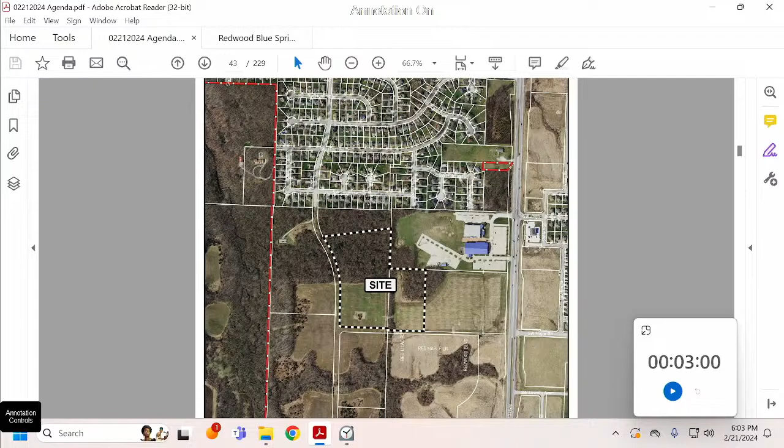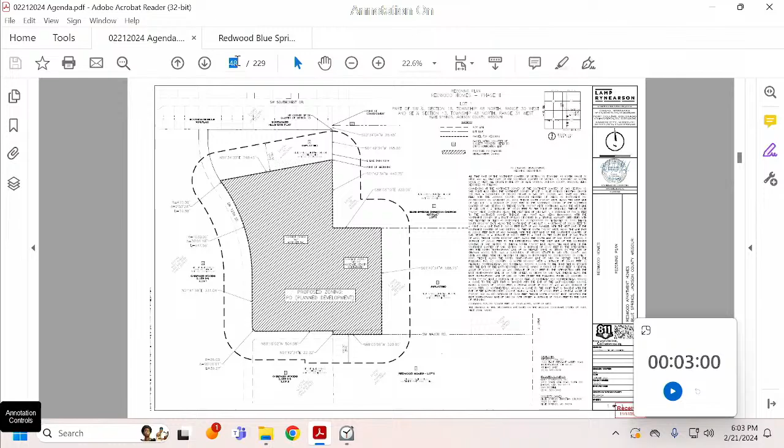The second request is for a PD concept plan to accommodate the development. The PD concept plan covers 18.78 acres requested to be rezoned and proposed to be platted as one lot. The proposed development includes 104 units in 19 single-story buildings ranging from 4 to 8 plexes. The unit sizes range from 1,294 to 1,620 square feet livable space. The development's housing density is 5.53 dwelling units per acre.

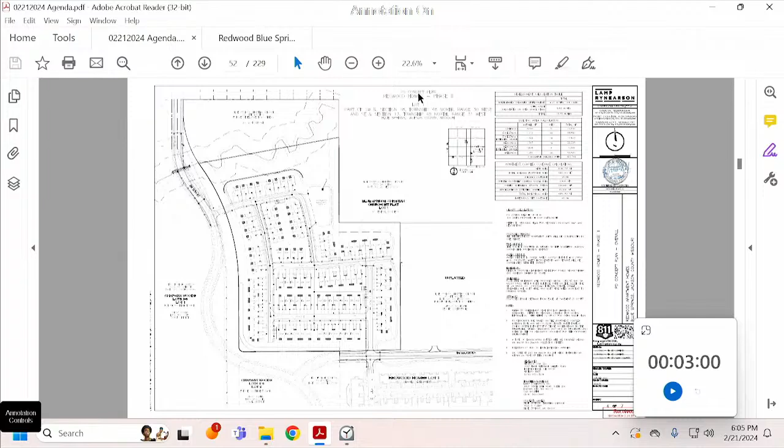As part of the Redwood's first development phase, Southwest Major Road will be extended west to Southwest 7 Highway to provide access. The additional extension of Southwest Major Road further west will be constructed to accommodate access for the second phase and additional access for the first phase. Furthermore, as part of the second phase, Southwest 12th Street will be extended south for the project entrance. A 5 feet wide ADA compliant sidewalk is required along the north side of Southwest Major Road, with an 8 feet wide ADA compliant multi-use trail on the south side. Along both sides of Southwest 12th Street, 5 feet wide ADA compliant sidewalks are required.

Through the PD zoning and concept plan, the site is being reviewed under the apartment complex building type and MF10 low-density multifamily zoning district standards. The plan meets all the requirements of the apartment complex building type for setbacks, density, building separation, coverage, and height. Each unit includes a front-loaded 2-car garage with a driveway for 2 additional parking spaces, for a total of 4 spaces per unit. Additionally, 26 guest parking spaces are provided on separate parking areas throughout the neighborhood.

Conceptual plans, elevations, and images have been provided for the buildings. Each unit includes a 2-car front-loaded garage with a private entrance. Building materials include a mix of masonry, vinyl siding with lap and shake styles, and a mix of colors. The residential design standards limit front-load garages to a maximum coverage of 25% of the facade. The proposed building plans include up to 78% of the front facade being garage doors. As the additional off-street and covered parking is an enhancement for the community, a modification through the PD concept plan is proposed to allow for this exception to the garage coverage. The plan includes enhancing garage door designs with added design details and hardware to mitigate the additional coverage.

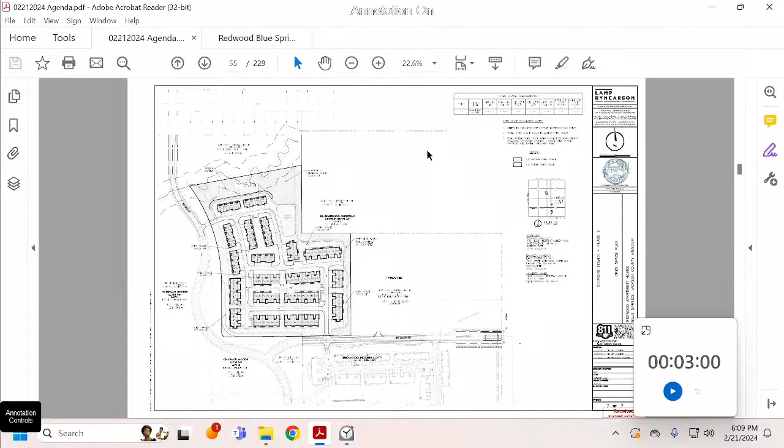Are there any questions from the council? Councilmember Fowler? Yes, Your Honor. Thank you for that summary.

On page 28, the list of reference documents attached, and the last sentence, the last few words, says 'and letter of opposition.' Could you tell me about that letter of opposition? I didn't see it there. Yeah, right in that box, the last of number 1 there, list of reference documents attached, and then it says a letter of opposition.

To our knowledge, we did not get a letter of opposition. That may have just been a holdover from a previous file that was left in there accidentally, but we did not receive any letters of opposition for this project. Okay, so apologize for that mistake. All right, thank you.

I think I remember from the first Redwood, the streets on this, they're not built to city standards. They're going to be private streets, is that correct? That's correct, private streets not built to city standards. And so they also don't have curbs? The last group didn't have curbs, this doesn't have curbs either. That's correct. So it's just the flat street and then someone's yard and then right into their driveway, etc. In terms of the street, the curb, and the sidewalk, that's correct.

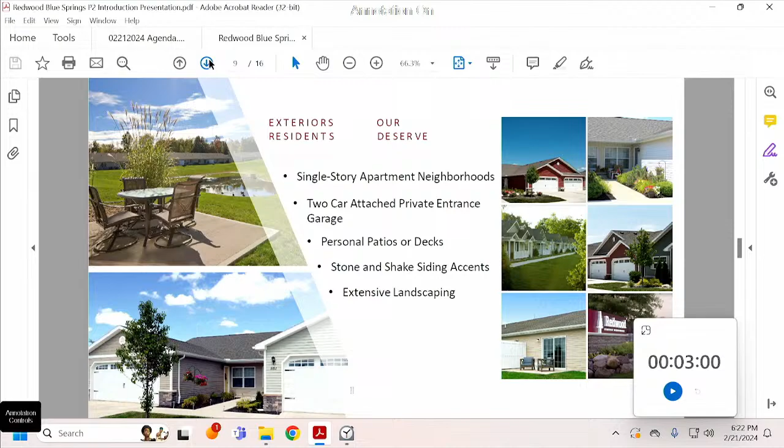Interiors are what you would expect in a nice apartment. Granite countertops, black steel appliances, luxury vinyl tile, nice plumbing fixtures, vaulted ceilings. It's something you would expect in a nice place.

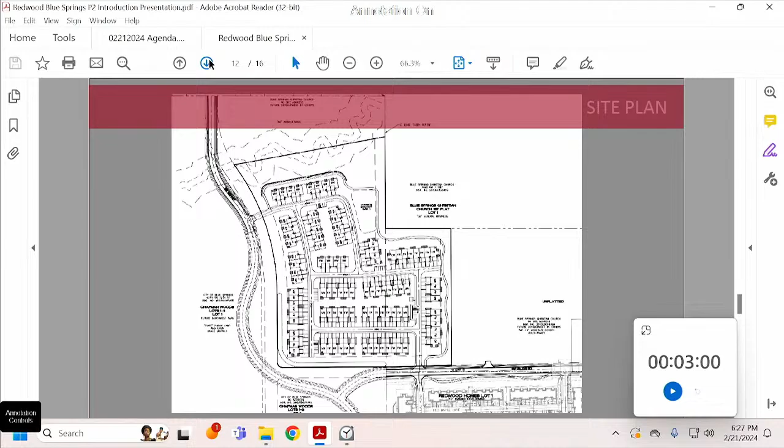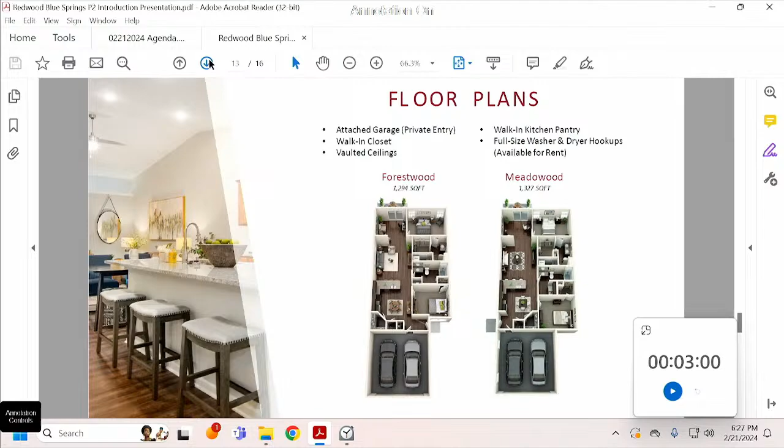Next slide, please. Example floor plan, same ones you've seen. Again, 2-car garage, 2-bedroom, 2-bath. Every unit is 2-bedroom, 2-bath, and every unit has a patio.

Next, please. The 2 different floor plans: the Forestwood is basically our bread and butter unit, Forestwood with a sunroom. The Meadowood is a little bit different, a different kind of floor plan. Again, 2-bedroom, 2-bath, 2-car garage, but just a different style floor plan. Next, please.

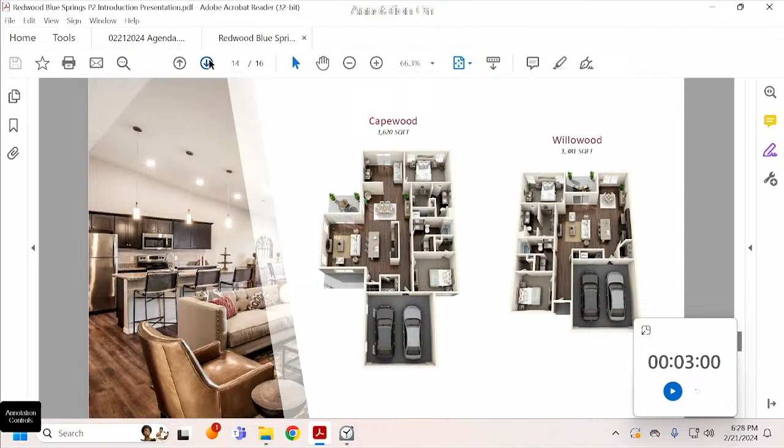So there's the plan for the park. I really just have it in here for reference.

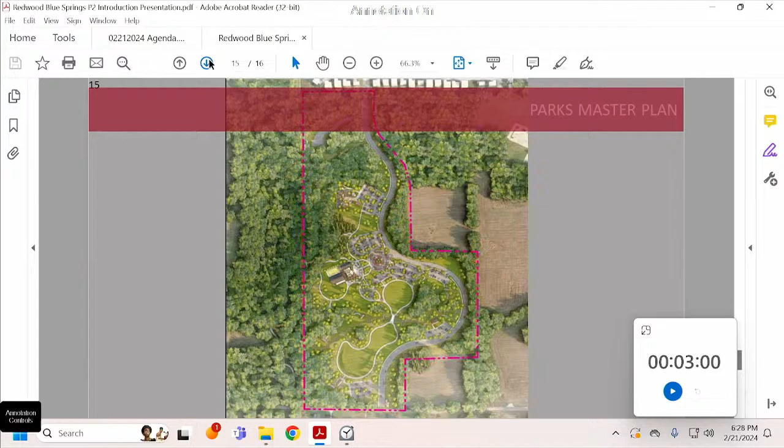I think the only other thing I have to say is we have been consistent with what we had proposed and had approved in phase 1. We've been consistent with the architecture, we've been consistent with the streets, we've been consistent with everything that has been approved in phase 1. I think that's it. If there are any questions.

At least on the application, it looks like here, at that point, the owner was the church. So is that, but you also mentioned tonight that you guys have bought the property, so.

All right, let me sort that out. We bought the property for phase 1, we've closed on it. The church still owns the phase 2 property. Okay, so at the moment, what we're talking about building tonight is still owned by the church. That's accurate, that's consistent with the application. Yeah, that's accurate. I'm sorry if I confused you.

That's fine. So the, and again, private streets, so you mentioned no parking on the streets. That, our police force couldn't enforce that on private streets, so you're gonna enforce that? Yes, and we do in all 160 neighborhoods.

Yeah, it just seems like when somebody has a small party or something, there's probably gonna be parking on the streets. Well, so a lot of it has to do with the length of people's stay. And a lot of it has to do with the nature of who our constituents are, and I'm not saying that there aren't empty nesters that are problematic, but a lot of it has to do with that as well. A lot of it has to do with each unit having 4 of its own and a smattering of parking places throughout the site, additional parking places throughout the site. So a lot of it has to do with that.

And a storage residential warehouse land use in addition to the general businesses land uses outlined in the UDC at 1800 Southwest Lenore Street. This property is generally located north of 40 Highway.

The first request is to rezone the subject property to PD Planned Development Commercial. The 2014 comprehensive plan included the subject property as mixed-use employment dominant.

Mixed-use employment dominant, which is defined as a mix of businesses that can include office, service, craft manufacturing, or light industrial uses, and small-scale retail or institutional uses to help support the primary function of other job-creating uses.

The intent of the PD zoning district is to encourage unique, high-quality neighborhoods, commercial or mixed-use development through an integrated development plan that provides flexibility to standard zoning district regulations.

Through the PD zoning, the applicant is requesting a car wash and storage residential use in addition to GB general business land uses outlined in the UDC.

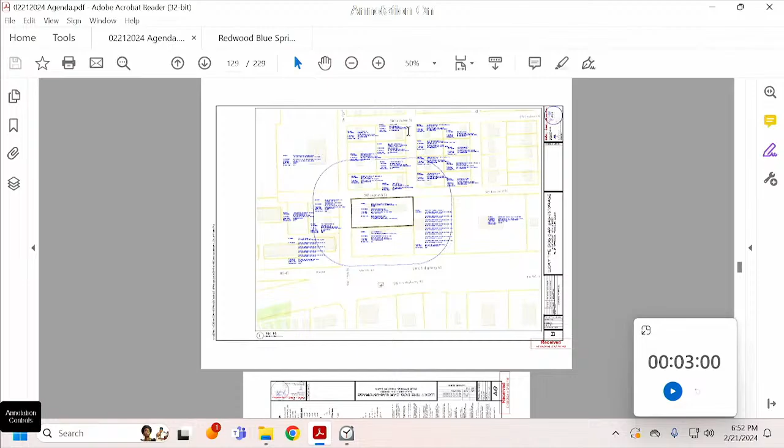The second request is for a planned development concept plan covering the entire 0.95 acre property. The site includes one 5,810 square foot metal building, car wash with car wash bays facing Southwest Lenore Street. According to UDC section...

405.080, when a property undergoes a change in use, only site improvements are required to be brought into conformance with the current development standards. Thus, no development improvements are required at this time, and it may remain as legal non-conforming structure.

However, any future building additions cannot increase the non-conformity of the building.

As part of the PD standards, the applicant is proposing the following. The only land uses allowed that would be permitted are car wash, storage units, storage residential warehouse, as well as land uses outlined in the general business zoning district.

And the subject property will utilize the general commercial building type, with modifications requested to the underlying zoning district. The proposed modifications include waiving the requirements bringing the site into conformance, waiving the required setbacks, bicycle parking, pedestrian access, and landscape requirements.

If allowed, warehouse residential storage shall provide one parking space per 5 storage bays. Based on the proposed storage bays, the applicant must provide 3 parking spaces to meet the required vehicle parking.

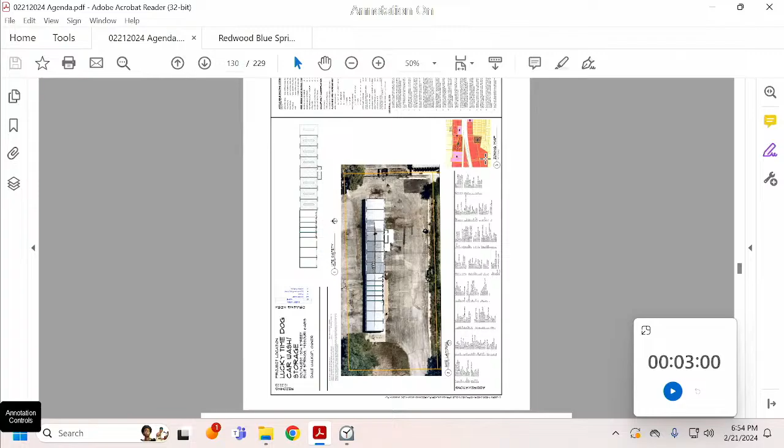Staff recommends approval of the planned development concept plan with conditions. Staff would be happy to answer any questions. Any questions from council?

Like seeing none. Oh, Your Honor, may I?

Go ahead. Just a question, with this being changed to storage, they've already increased the size of the unit as far as roof plant and that. Does that affect anything as far as stormwater runoff? In other words, this is a lot of paved surface and there's been issues with the stormwater runoff because there's really no detention for it.

All that pavement surface just runs right down the street. As Councilman Fowler mentioned earlier, we do have some issues in the older part of town with no curbs and gutters. So it'd be nice to maybe have some improvement to that part of the paved impervious surface to at least compensate for some of that stormwater runoff with all these improvements that we're approving.

It's my understanding that because they're not adding any additional square footage, they're only filling in the car wash bays themselves, that they're not adding to the impervious surface on the site and therefore are not required to provide any additional water quality or detention.

Okay, because of that. If they were adding square footage in terms of building area or removing any landscaping and putting in pavement or building area, they'd be increasing the level of runoff and therefore would be required to add detention or water quality devices.

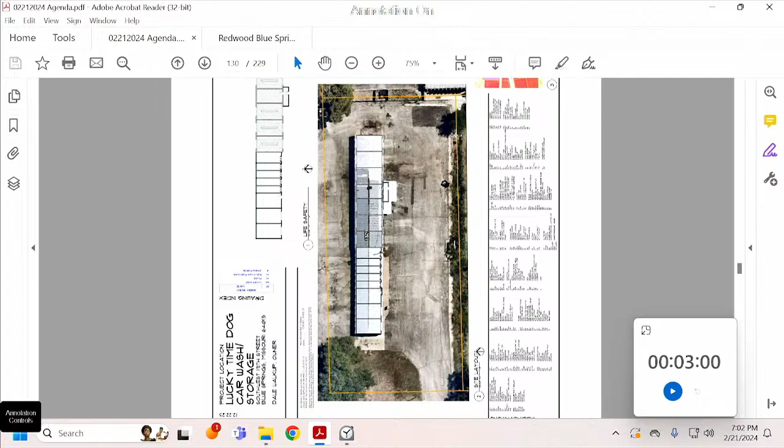So it doesn't run across this piece of property? It does run across, because the road water comes off the middle of the road and goes that direction. The north side of the road will drain over to the other side, but most of that water comes this way and down the street as it descends, running between the property next to this one on the east side and Blue Springs Rental. There's a section there where it flows, and with a big storm, it backs up pretty good.

Well, I was just curious if that created some of the water issue, if there was something the city could do, a culvert or whatever. I don't know if that's a possibility, but I was curious how much of that water is coming from the street itself. All right, thank you.

Anyone else? Okay, is the applicant present? It does not appear that the applicant is with us this evening. We did remind him of tonight's public hearing, both him, the property owner, and his consultant. That's why we've been so focused on the door, as to whether or not they are running late. We did not get any emails or phone calls about being caught up in traffic or something, so we're not quite sure.

Let's go to the public. Anyone in the audience like to speak in support?

Support of, opposition to, opposition to. We close this public hearing. Who would like to introduce bill number 5187?

I'll introduce it. First reading of Bill 5187, an ordinance rezoning property from GB General Business to PD Commercial Plan Development Commercial and approving a plan development concept plan for Lucky Time Dog Car Wash at 1800 Southwest Leonard Street. Your Honor, move the bill be approved on its first reading and proceed with the second.

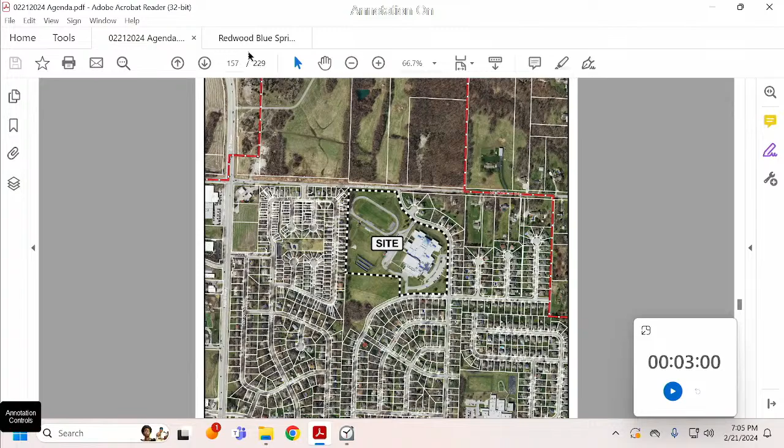The property is zoned SF7 single family. The proposed building addition will be located in the rear southeast of the existing building and requires approval of the general development plan and the site plan design review. The materials of the building addition will be masonry, brick, metal, and metal panel. Overall, the building design and materials are durable, high quality, and exceed the minimal design standards for non-residential buildings. The building is classified as a prominent civic building and meets all requirements regarding setback, building coverage, and building height.

Exterior electrical lighting panel location is to remain the same. Any additional lighting will be reviewed through the building permit review process. Prior to building permit approval, the site will also be required to be platted. Both a preliminary plat and final plat have been provided. The existing sidewalk and ramps along Northwest First Street shall be replaced to meet ADA regulations. The applicant is not proposing any changes to parking or landscaping.

Staff reviewed the GDP and finds that all review criteria have been met, allowing for improvements to be made to the existing site and land use. On February 12, 2024, the Planning Commission recommended approval of the general development plan and final plat. No one spoke in opposition or in favor of the project. They also approved the site plan design review and preliminary plat. Staff recommends approval of the general development plan with conditions. I'll be happy to answer any questions you all may have.

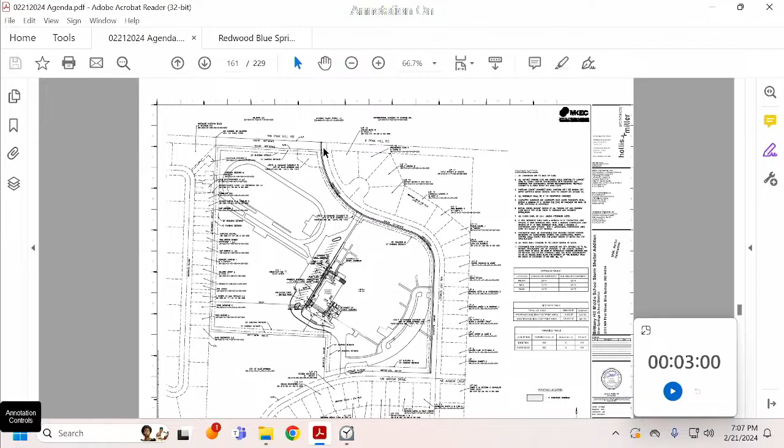Questions from the council? Seeing none. Okay. Is the applicant present? Would you like to come be sworn in?

Do you swear that the testimony about to be given in this case is the truth? Yes, sir. Christopher Koch, 1828 Walnut Street, Kansas City, Missouri, on behalf of the Blue Springs School District.

Thank you, council, for letting me be up here again today, as usual, for the school district. This project is one of four identical projects for all middle schools for the Blue Springs School District. It is the only one in Blue Springs, and the only one across the three cities that Blue Springs School District has these projects in, that is required for this review. I think it's to do with the lot configuration and the lack of a plat.

The goal here is to add storm shelters for all 4 middle schools. Prior to the adoption of International Building Code 2018, schools were not required to provide storm shelters, but since the city has adopted that, the school district has made it a priority, even before the adoption of that code. The ICC 500/2020 requires storm shelter capacities to be set for the occupant load of the addition, or if more than 50% of the building is being modified, the occupant load of that portion.

So in these schools, as well as every other school the district has built, the storm shelters are sized for the entire school capacity, along with staff and the regular number of guests. Paramount, obviously, is the safety of our citizens, children, and the educators in these schools.